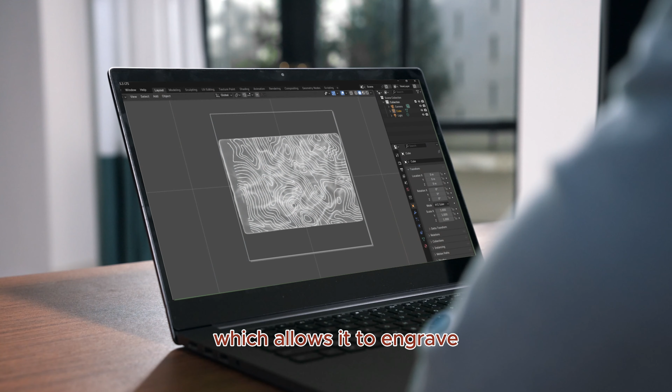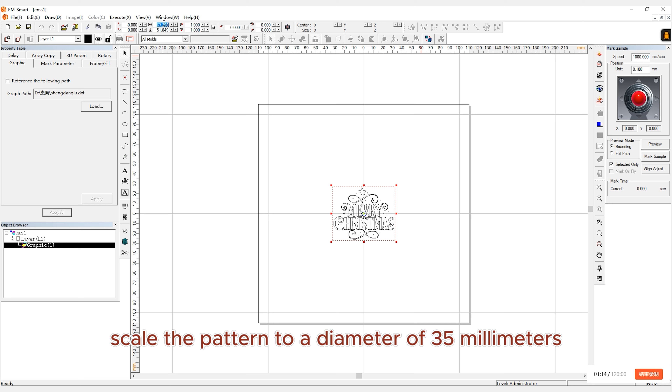Today, we have a metal Christmas ball ready. It's a sphere with a diameter of 63 millimeters. Now let's secure it on the fixture and get started on our project. First, open the EM-Smart AXI software and create a new file. Click File, then Import. Load the SVG design you want to engrave onto the Christmas ball. Scale the pattern to a diameter of 35 millimeters.

Second, open 3D Param in the Property panel. In the Model library, find the model that matches the shape of the Christmas ball. Third, adjust Calculate Curve Radius to match the size of the Christmas ball, setting the surface width to 63 millimeters and the height to 31.5 millimeters.

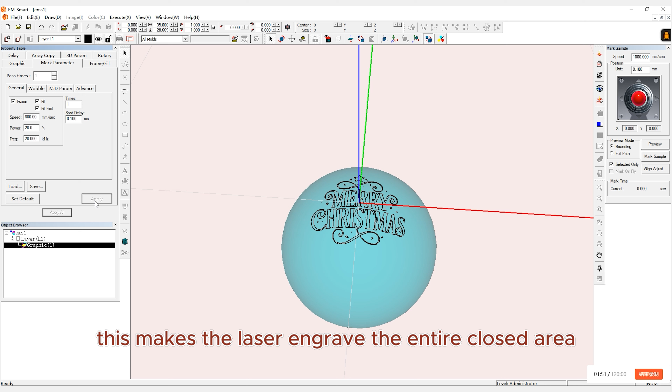Fourth, go to Mark Parameter and select Fill. This makes the laser engrave the entire closed area, rather than just outlining it. Then set the engraving parameters, power at 20% and speed at 800 millimeters per second.

Fifth, in Frame, Fill, select Average Distribution, set Angle Start to 45 degrees, Angle Step to 90 degrees, and times to 10, using varied angles to increase depth and uniformity.

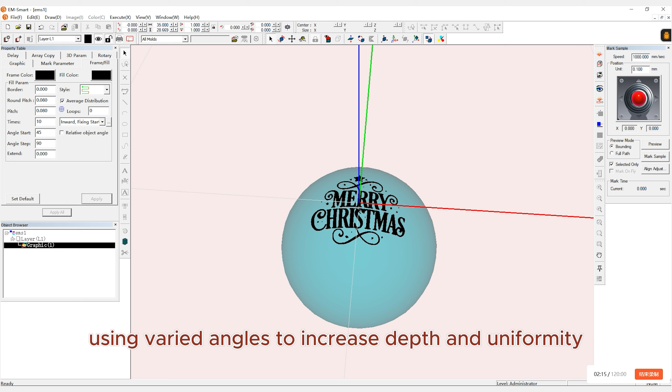Sixth, click Show 3D to view the engraving position and effect from multiple angles, then switch to the planar view. Click Preview to check the positioning on the physical object. Turn off auto marking and click Start Engraving.

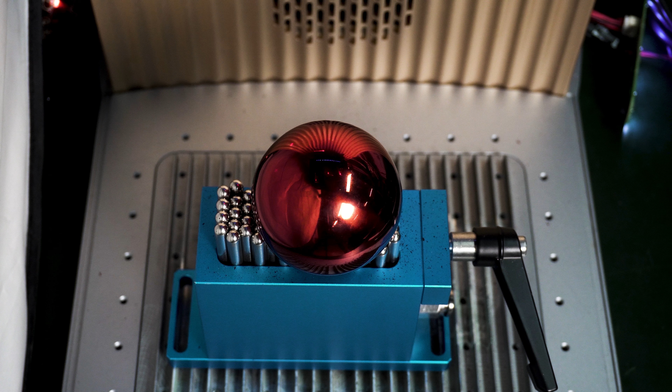We can see the engraving process clearly. The whole process is quick with amazing detail. The marking speed is about 15,000 millimeters per second, so the engraving finishes in just a few minutes. Here is our final result. AXI gives you roughly 10 times the dual focus precision, making curved engraving super clean and crisp. The entire design is perfectly engraved onto the Christmas bauble.

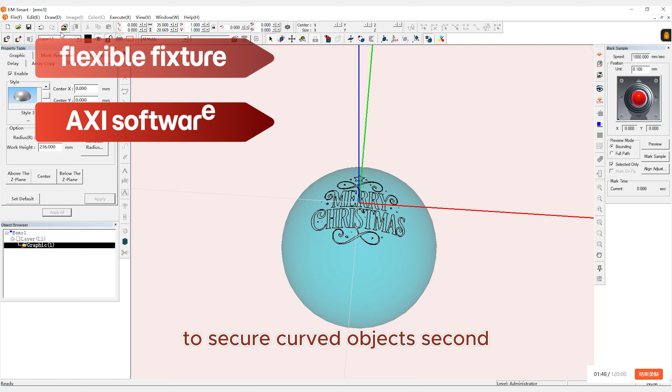Let's recap today's tutorial. First, we learned how to use the flexible fixture to secure curved objects. Second, we learned how to operate the AXI software. Third, we went through the full workflow of 3D curved surface laser engraving.